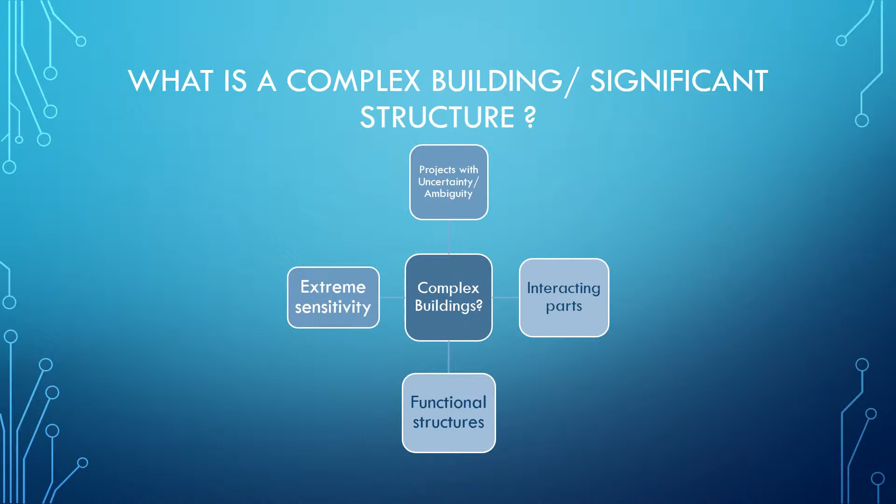Firstly, it is important to identify what defines a special structure or complex building. A complex building can be a project with high levels of uncertainty or ambiguity. It may have interacting parts, or there could be functional structures as well. Alternatively, there could be high levels of extreme sensitivity.

Today we're going to look at the Petronas Towers. The Petronas Towers is situated in the city centre of Kuala Lumpur and it was officially opened in 1999. Here are some facts about the Petronas Towers. It began in operation in 1992 with the construction work and planning beginning then. Since it's opened, it's become 452 metres high, weighing 300,000 tonnes with each tower.

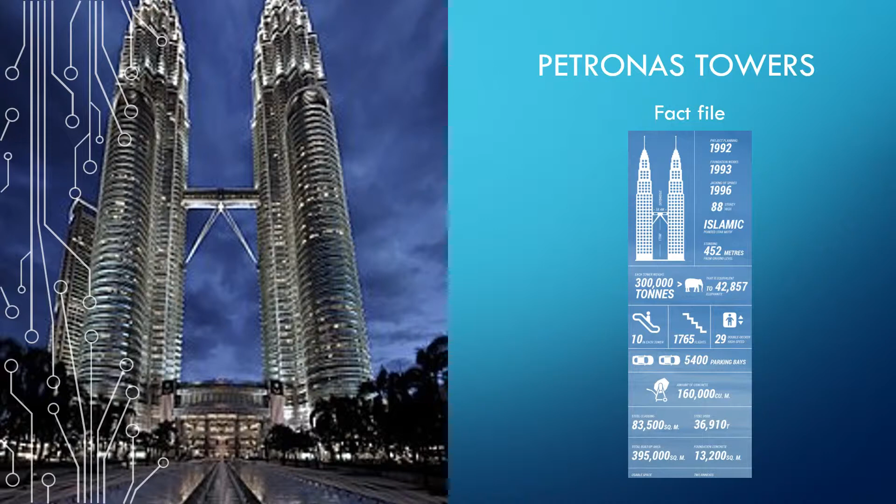It must be mentioned that this was the tallest building when it was built. However, in 2004, it was surpassed by the Taipei 101 building to make it one of the largest buildings. However, it still remains the tallest twin towers.

The project objective. The project objective of the Petronas Towers was to create an entertainment, commercial and business focal point to attract tourists at the heart of the city centre. In addition to this, it was identified that the project objective was to create a pair of gigantic skyscrapers. The project is identified as the home of Malaysia's national oil company owned by Petronas. The building is currently predominantly occupied by subsidiaries and associates of the company.

Architect. The architect of the Petronas building was a man called Cesar Pelli. He was an Argentinian architect who designed some of the world's tallest buildings and other major landmarks, such as the Pacific Design Center in Los Angeles and the Salesforce Tower in San Francisco.

The project was initially estimated to complete in 8 years. However, Malaysia looked at ways to speed up the process and found a solution which could see the building being built in 6 years. In order to meet the strict deadline, 2 different construction firms were hired and assigned to each tower. These 2 construction firms were Hazama Corporation, who was in charge of Tower 1, and Samsung Engineering and Construction, who was in charge of Tower 2.

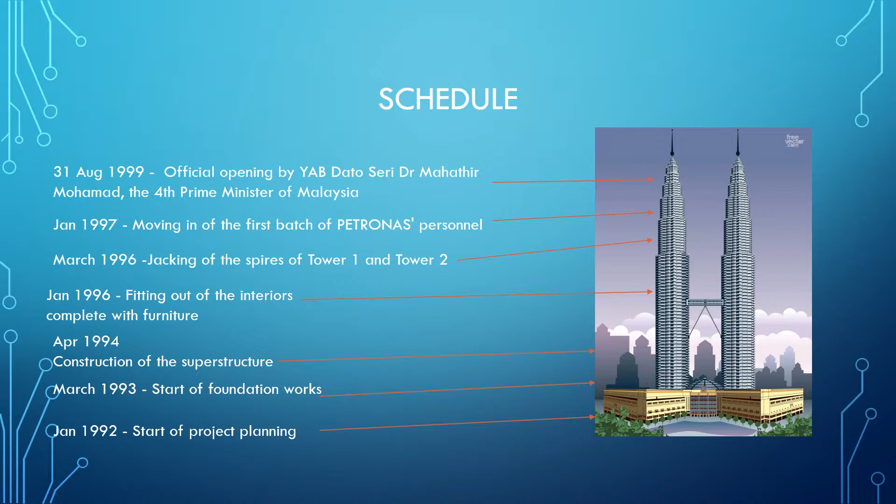This was followed in 1996 by the fitting of the interior, complete with furniture, shortly followed by the jacking of the spires of towers 1 and 2. It was in 1997 that the first batch of Petronas people began to move in. And finally, the towers officially opened when the Prime Minister of Malaysia opened them in 1999.

The initial proposal was for the Petronas Towers to be built on the former site of the Selangor Turf Club, which was one of the major horse racing courses in Malaysia. This was because the land was identified as flat and green, and therefore no previous construction had taken place. However, with the project taking up a large surface area, a large soil investigation took place. This involved drilling over 400 boreholes into the earth.

Evidence of the soil study showed that the original planning location was situated on the edge of a cliff known as Kenny Hill. The soil study showed that the bedrock sloped down, as it began shallow at 15 meters and increased rapidly to over 180 meters.

Typically, limestone can be identified to be strong as it provides good end bearings. However, in the case of the limestone, it was identified to have cavities in it and therefore causing soil problems. This was a major issue as over time, the limestone bedrock can cause unevenness and lead to large movement.

As a solution, the construction firm decided to relocate the position of the building by moving 60 meters southeast of the initial proposal in order to obtain better support for the project, as illustrated in the diagram.

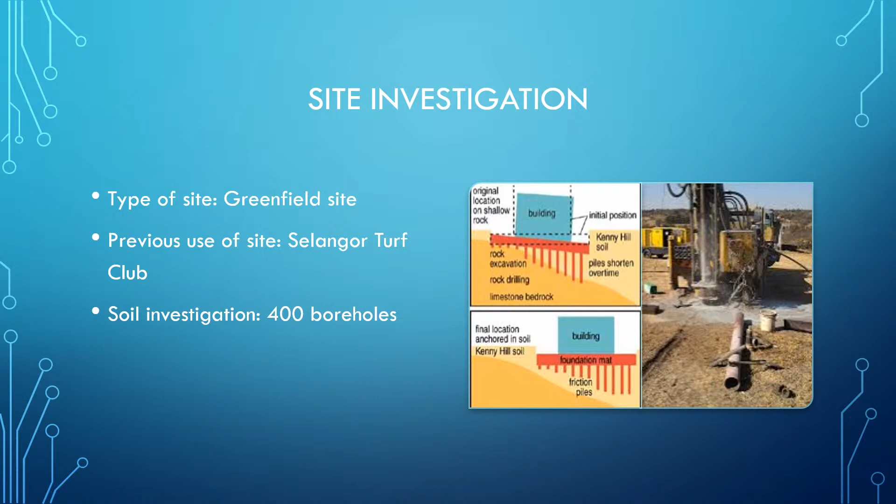Foundations can be used to support the structure of the load bearing to the layers of the soil or rock. In terms of foundation, the structure used a piled raft foundation. This is formed using long, slender columns made from reinforced steel and concrete. There is no surprise that pile raft foundations were selected as they are becoming increasingly popular when constructing high-rise buildings.

The use of rectangular piles were chosen as opposed to circular piles. This was due to them having a larger diameter and therefore suggesting that fewer numbers of piles were needed. But having piles with a greater diameter meant that safety margins were increased, which ultimately reduced the probability of a problem occurring. The length of the pile raft foundations varied in size in order to ensure it stayed well above the unsettled limestone.

In addition to being the world's tallest building at the time, the project also had the world's deepest foundation, with the largest steel piles being drilled 125 meters into the ground. This was almost 3 times deeper than the foundations used in the Sears Tower, which was the previous tallest building in the world.

Piles were supported using a concrete mix. To fill the foundation, over 13,000 cubic meters of concrete was required. To put this in perspective, this is the equivalent to 5 Olympic swimming pools. As concrete is a material that is fast setting, the concrete was poured consistently for 54 hours non-stop to ensure that the foundation was strongly built and embedded.

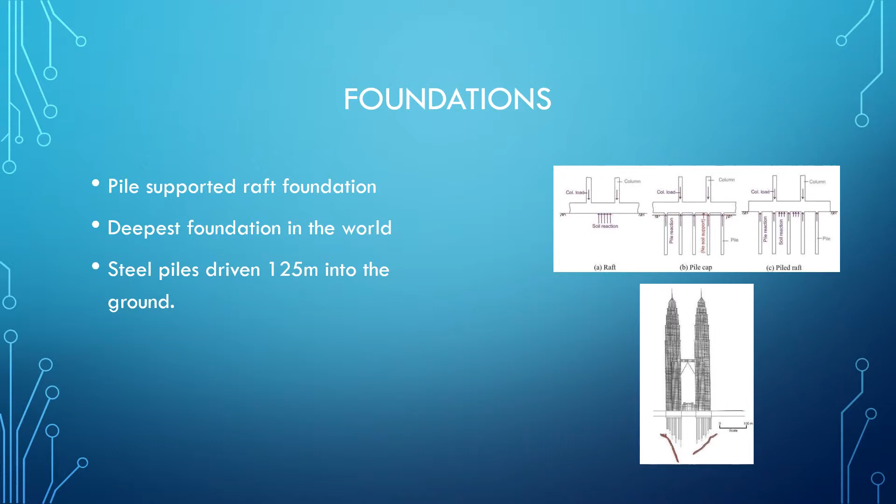In terms of the floor design concept, the Petronas Towers are shaped based on distinctive Islamic art. In Islamic law, it is forbidden for pictures of people to be used. Instead, it used simple Islamic geometric forms such as shapes and designs. The Petronas Towers use 2 interlocking squares to create an 8-pointed star. This is called Rub al-Hizb.

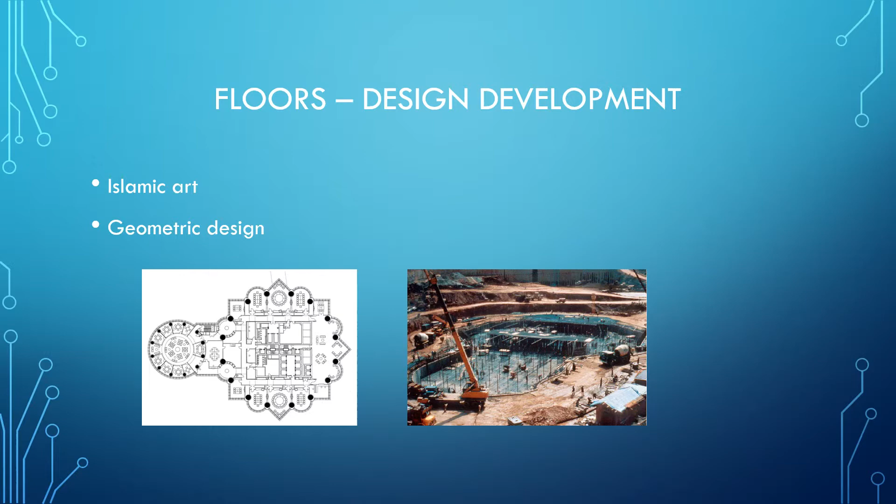Originally, the floor plan design had a fundamental problem as its interlocking squares limited the usable floor space in the building. Instead, each tower is supported by a ring of 16 cylinder columns which are of high-strength reinforced concrete. These cylinders are placed in the inner corner of the star-shaped plan as indicated in the diagram.

The initial diameter of the column stands at 2.4 meters. However, the column gets reduced as they get higher up the building. In addition, the floor system consisted of wide flange beams spanning from the core to the columns.

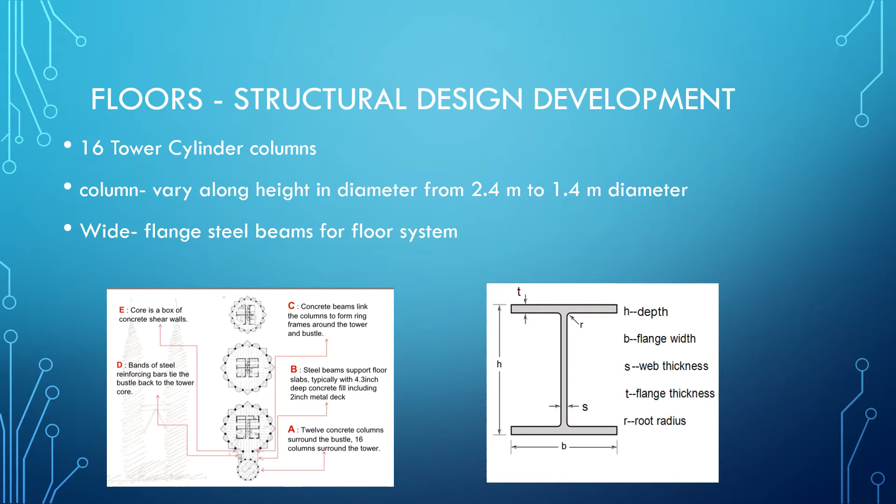A tube-in-tube system had been used for the lateral structure of the building. The system was introduced by Fazlur Rahman Khan. Tube-in-tube systems are used to resist lateral loads such as wind. And the building is designed to act like a hollow cylinder. This is identified as extremely common in extremely tall buildings.

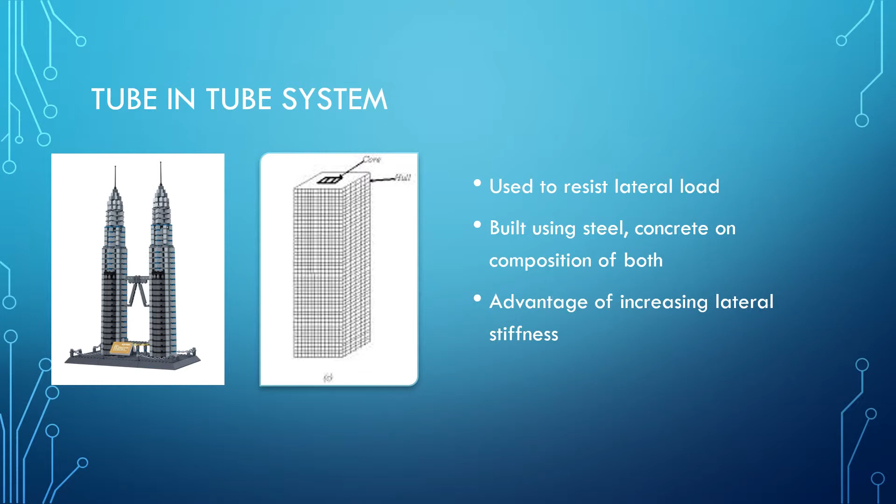A tube-in-tube system consists of a core tube inside the structural tube, which holds services such as utilities and lifts, as well as usable tube systems on the exterior, which takes the majority of the gravity and lateral loads. The inner and outer tubes interact. This provides the advantage of increased lateral stiffness. The system is built using either steel, concrete, or a composition of both.

In terms of external finishes, a total of 83,500 square meters of stainless steel extrusions and 55,000 square meters of laminated glass were used to clad the walls. Designed as a curtain wall exterior, the cladding comprised 33,000 laminated glass panels in all. Each panel is as high as one floor and spans from ledge to ledge.

Stainless steel extrusions are used for these types of profiles due to the material's wear and corrosion resistance. In addition to being essentially rust-proof, some grades of stainless steel are also immune to acid and other highly corrosive compounds, even in high concentrations. Laminated glass was preferred for its safety, sound insulation, durability, and solar energy control.

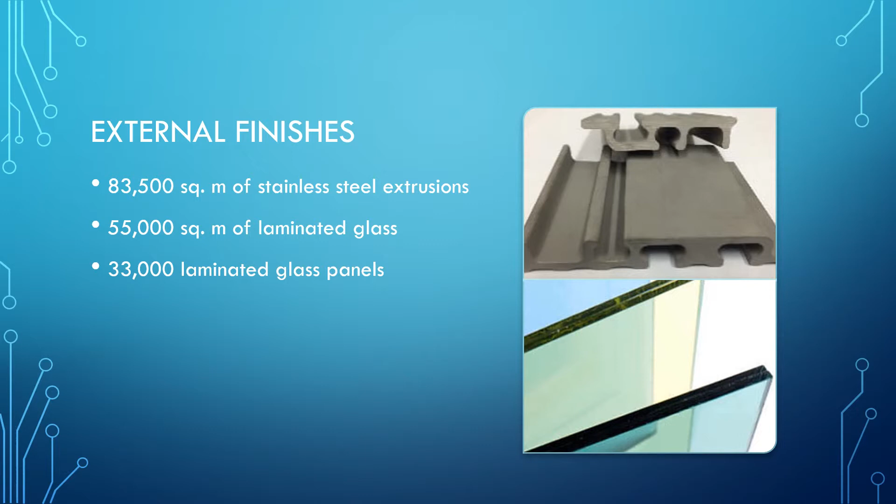Like the typical floor plan floors, cladding was constructed using the 4-day cycle system. All panels were interlocked and placed in a downward-upward position.

Now we'll look at the special features. One of the key special features of the Petronas building was the Sky Bridge. The Sky Bridge connects the two buildings together on the 41st and 42nd floor. The two hinge arch supporting the bridge has a rotational pin at the end of each leg and at the top of the crown of the arch bearings.

The main bridge girders have a rotational pin directly over the arch crown to permit the crown to rise and fall as the towers move closer and further apart from each other.

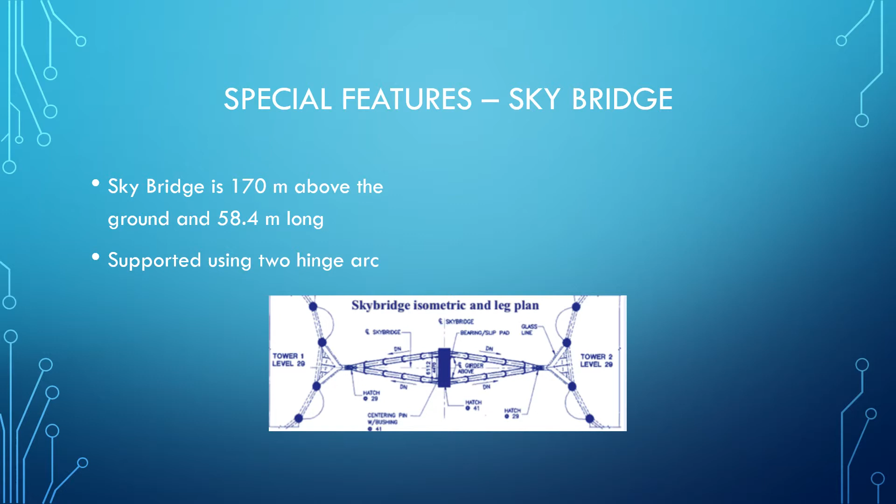Another special feature is the pinnacle. This is the crown glory of the Twin Towers, with the pair of 73.5 metre steel columns, the pinnacles, which propelled the tower to fame as the world's tallest building. Each pinnacle was comprised of a mast, a spire ball, and a ring ball, all of which were lifted piece by piece. It must be mentioned that the pinnacles were manufactured off-site and transported to the location.

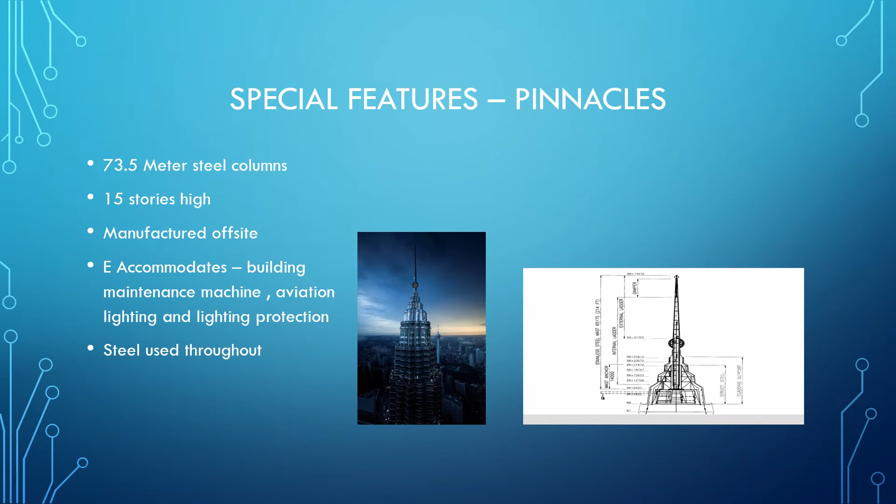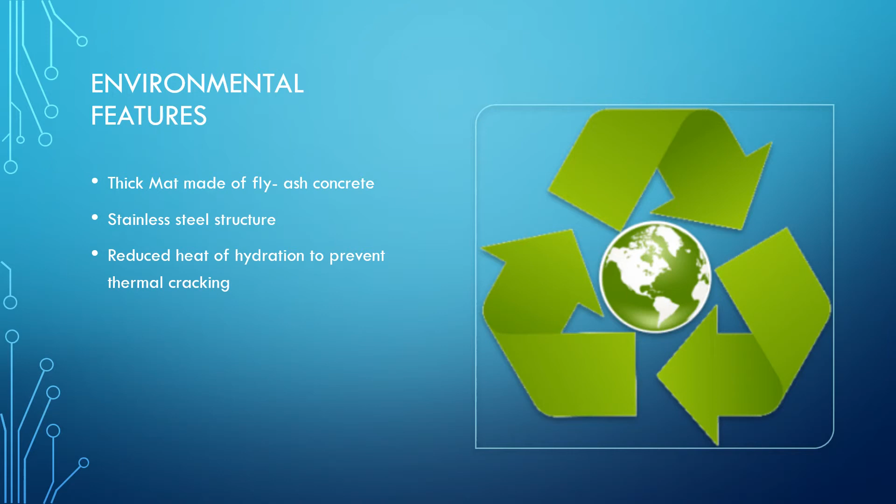In terms of environmental features, the Petronas Towers uses high strength fly ash concrete, which can reduce both the size and the weight of the building's structural members. This can result in a saving of both material and cost. Secondly, the Petronas Towers is made from a stainless steel structure that acts as both the internal and external structural framing. Using steel can mean a large saving in maintenance costs.

Constraints. In terms of constraints, engineers still faced challenges in ensuring that the building remained straight when built up. The alignment of the building was checked every single day to ensure that there was no swaying. However, when the tower reached the 40th floor, one of the towers seemed to be swaying off tangent. This issue was resolved by overcorrecting the deficit in the opposite direction in order to cancel it out and lead to the correct verticality.

Another issue was when the engineers planned to lift the Sky Bridge into place in midair. The engineers decided to assemble the Sky Bridge during the time of torrential rain in Malaysia. It was decided the Sky Bridge should be assembled on the ground and lifted into place in one large piece. The technique used was to put the Sky Bridge into place using

hydraulic jacks. Unfortunately, due to the torrential rain, the cranes were struck by the weather, which led to problems in the electrical systems. It was initially planned for the bridge to be lifted in 20 hours, but it eventually took a staggering 36.

In terms of material management, skyscrapers are usually built with steel. However, steel is regarded as very expensive, and Malaysia had a shortage of it, as well as being very unfamiliar with it within the construction industry. Building a tower of such height with steel would have blown the proposed budget, and instead they opted to use a material which Malaysia had an abundance of, which was concrete.

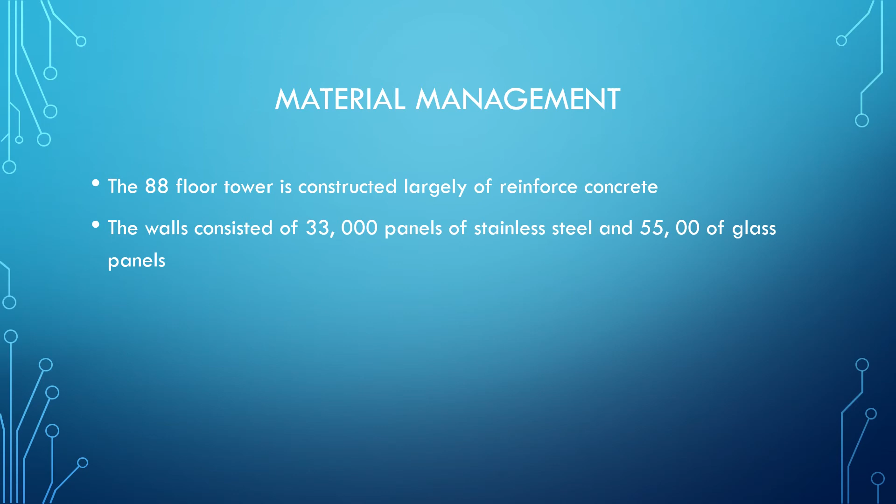In terms of health and safety, locating the bridge on the 41st and 42nd floor meant that in case of emergencies, individuals could relocate from one tower to the other. This ultimately halved the need for staircases. The design requirements stressed the importance of fire protection and a life safety plan to seek compliance with the code. A minimum of two pathways were required on every floor.

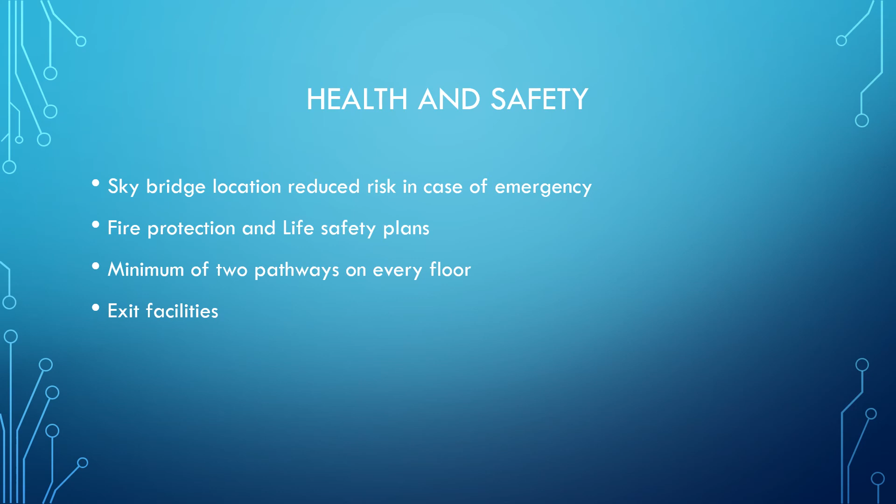In addition, although the Kuala Lumpur Fire Authority has the responsibility for providing fire safety, it was recognised that the building must include integral building designs to ensure that the risk of fire is reduced. This included a number of factors such as sprinklers throughout the building, smoke management systems, and various exit facilities. As Malaysia was a former British colony, they have been using the British Standard as a code of practice within the construction industry.

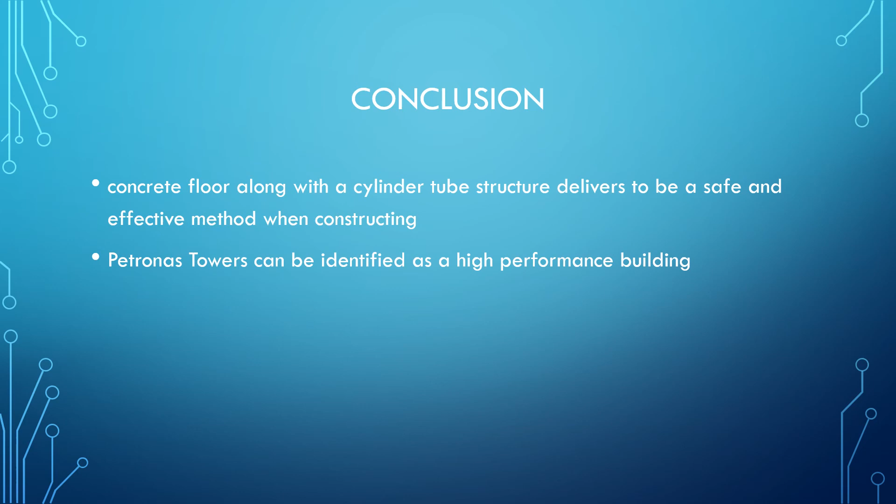In conclusion, using a concrete floor along with a cylinder tube structure proved to be a safe and effective method when constructing the world's tallest building. When considering all the constraints that occurred during the project, it was a remarkable achievement for the project to be completed on time. Thank you for watching my presentation.